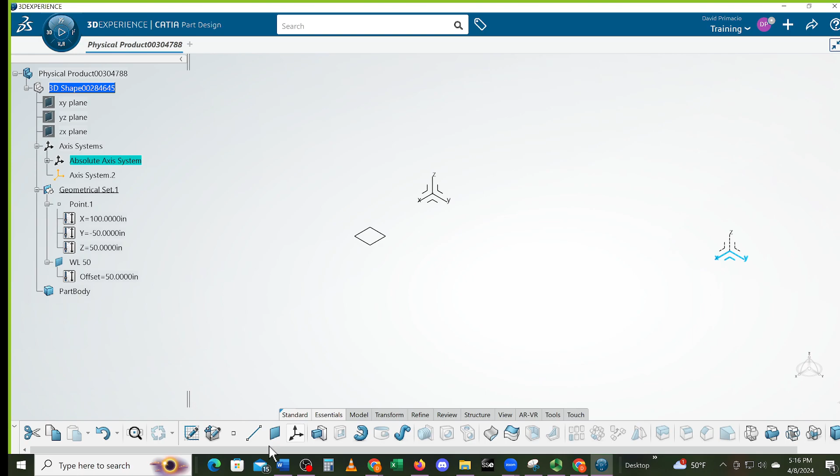So I'm going to create another plane. And the top was 50 plus 5/8. So even though they are on the same plane, they're on a different part of the world.

Everything is referenced eventually off the absolute axis. So no matter where you create your local axis, that's all fine and dandy, but it all has to relate to the absolute axis. That's why he's pulling the planes off the absolute axis rather than the local axis, so that when it goes to the next person looking at it, they already know everything comes off the absolute axis.

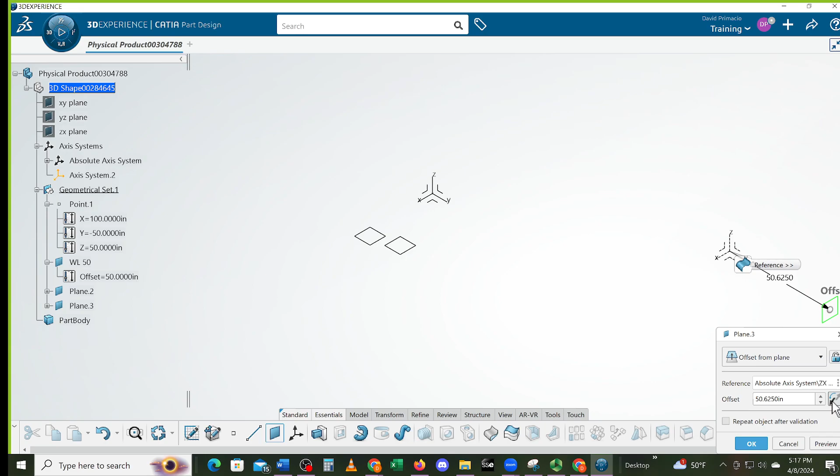Makes sense. I'll reverse it. No, you know what, I don't reverse it. Let's see if I can remember this. I type in -50, was that the furthest one out? Yes. Now again, it looks weird because for me personally, mentally I just gotta move it over here to where in my mind it's kind of close to where I want it to be. But again, I did the -50 because I like it to match up with my y vector.

You're going to see why I do this too, because we're going to create a dimension drawing that doesn't have dimensions on it. It has station line, buttock line, water lines.

And then what's the shortest one? -39.

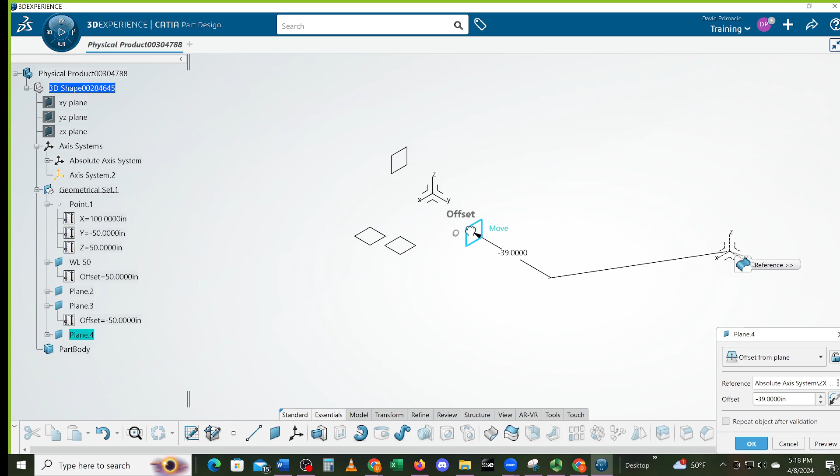See, when I start zooming up, all of a sudden it looks weird. So sometimes I'll move my planes around after I build my part just to kind of get a feel for what's going on.

Now, if I remember right, if I have that axis there, what did I put that on? That was 50, right, in the X direction? Was that 100? 100, thank you, that's 100. And that represented the front of it, right, of the steps, correct? Yes.

Oh, and I didn't create the station the part was built off of. So I'm going to go plane.

I'm getting myself confused. That was, this face is 100, right? The other one is 50. And this is what, 95? Yes, okay, thanks.

All right, so now really you should rename them, because it gets confusing when you don't rename these things, especially if you start getting a whole bunch on here. But for the sake of time, I'm going to just try and rip through this.

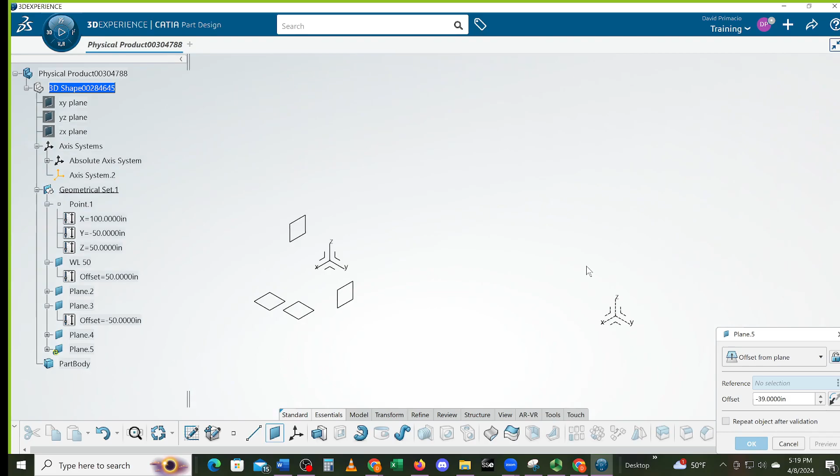So from this plane, we want to go 100 inches, right? Yep. And I'm just going to move it over this way. Now, you don't have to. You could have left them all exactly where they were, create all the line intersections. Once you see your line intersections, then start dealing with it, right?

So, did I show you how to intersect these planes? What did I use? Yeah, another plane, 95. You're missing one. Okay, we'll put that on, 95 in X. Just slide it over there for now.

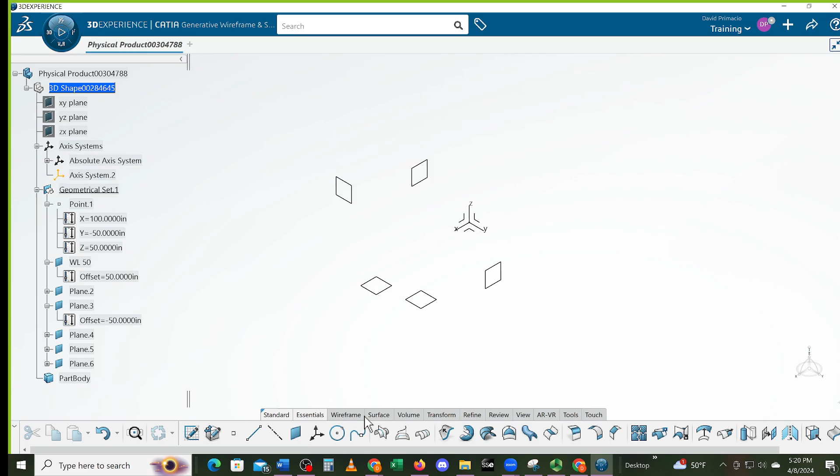Okay, now how did I create those lines that were intersecting? In a wireframe, so I have to switch workbenches, right? Was how we did it. Yes. I just used generative wireframe. Yes, and which tab did we find that under? Wireframe tab, I believe. Thank you.

And then which one was it? Intersect, you guys remember where that was? Which feature that was, at the bottom right? Do you see how that looks like two surfaces are intersecting each other, a flat intersection intersecting like a curved surface? Does that look at all like that to you guys? No, they should have chosen a better picture. Yeah, sometimes the hieroglyphics on this isn't the best.

Did I show you how to create multiple intersection lines all at once? Yes, and you gotta grab all the planes before you hit it.

Okay, so I want to create all the lines on station 100. So what 4 planes would I want to have active? Primacio, where's your Z planes, your Z axis planes? Aren't they there at the bottom? That's this one, and this, well, one. I'm seeing 5, and we should have 6. Oh, not yet, not yet. I'm just getting the 4 basic ones, the outer part of it. So if I want, this is station 100 right here, right?

Yes, and I want to intersect the buttock lines and the water lines to that. Does anybody know how I would do that in one step? Grab the 2 station lines and... No, I'm just going to do it on station 100. Oh, okay. So what would you guys do?

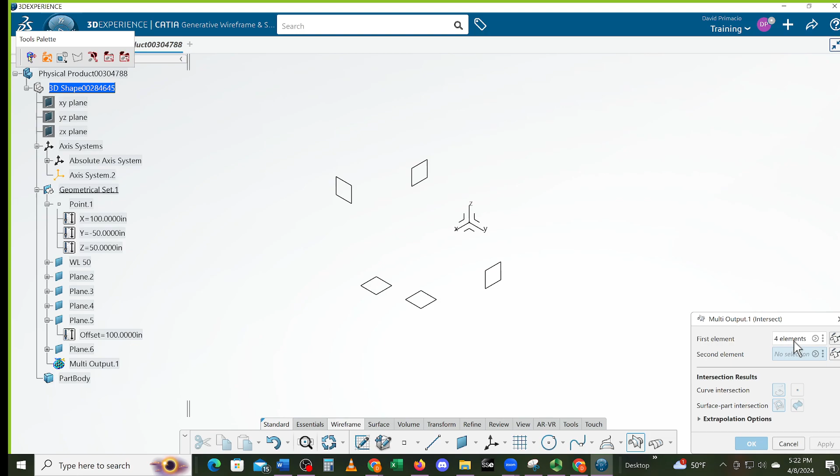We'll do that later on. But I grabbed all 4. Is that what I did in the demo? Grabbed a bunch and then selected a plane? Yeah, okay. So I select that plane and select OK. Yep, and look how far away I am from this. So a lot of times I'll just, after I get something here, I'll move those planes.

All right, now did I show you how to trim those? Yes. What did I use? Trim. There's... You go to, I think it was under Transform? Surface tab, right. I think there's a transform. Right there, yeah, that's what it was.

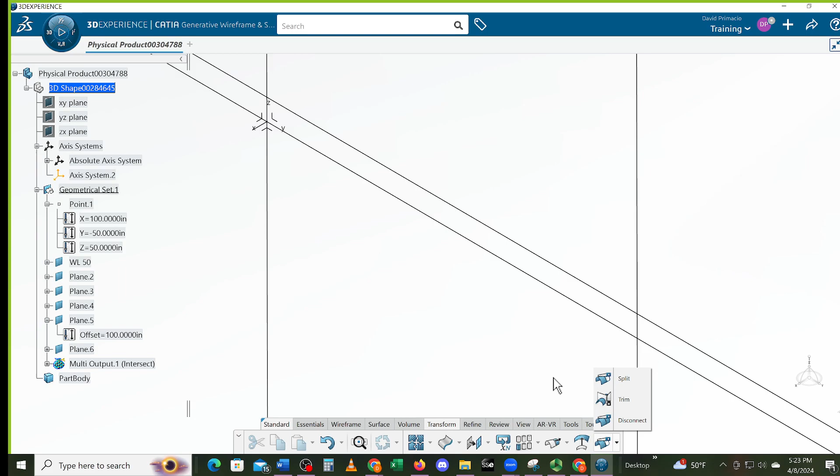Down arrow. So I have trim and split options. Did I do both? Yes, did both. Okay, what would you guys, based on what you learned, how would you trim this up? I'd use trim.

And then we click select on all 4 lines, keeping all the lines we want to keep. Yes, is that what I did? That's what I did, and it worked. Yeah. And then say OK? Yeah.

Yep. Oh, sweet, you went through, did 2 lines at a time, and that's more expressive. But I don't know whether you showed us how to do them all at one time later, but that's kind of intuitive. Actually, you did show us how to do that in the split, and if you reverse engineer that, it was select all 4 and it'll happen. Okay, so basically, if I can't get one to work, I try a different one.

Okay, all right, so now I want to put the steps in. What was the run? 2 inches, 2 inches, I remember right. And it started from the front or back? From here? From here, right? And from here, I said 2-inch run, right? Is what I said? Yep.

Okay, yeah. So what I would do is I would label the one that's here so I know what the hell I'm clicking on, right? That's this plane here. Because I don't think I went in to show you this. I just kind of showed you a general gist to see what you would do for the rest of it, giving you the concept of what to do.

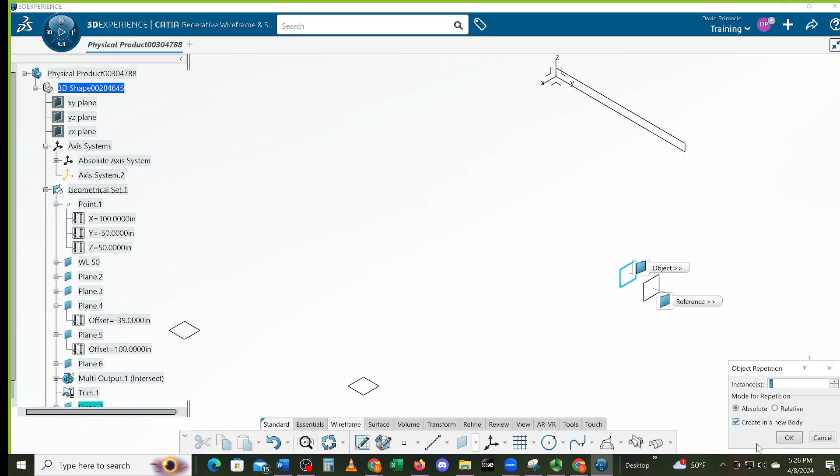And this is where I always get confused because Dassault is always changing this crap. I probably should say another word, but you know what I'm saying. Sometimes I say 2 and it adds 2 more. Sometimes I say 2 and it adds 2 total, this one being 1 and another one being that. And there's no preview, so I'm going to try 2 and hit OK and see what it does. So this would be from here to here is 2 inches, here to here is 2 inches, and then here to here is 2 inches. That would be my first 3 steps, right?

Yes. And then I got this top plane. Nope, that's the wrong one, isn't it? See, a lower... I got the plane, because this one looks lower to me because of where I set that. So I'm just going to double click it and move it up higher, so in my mind it's higher. And it's the one at 50.625, right?

Yes. Anybody have any idea what I'm thinking right now? What I'm about to demo? Kind of, intersect them. What am I going to type?

Why did I do 1/8? Oh my God, what happened? Oh David, what are you doing? I got ahead of myself here. Forgot to say okay.

Does anybody know where I'm going now? You're going to build the steps, the tops of the steps, the 1/8 inch step. Thank you. On the 2 from this plane, and oh God, where is it in the tree?

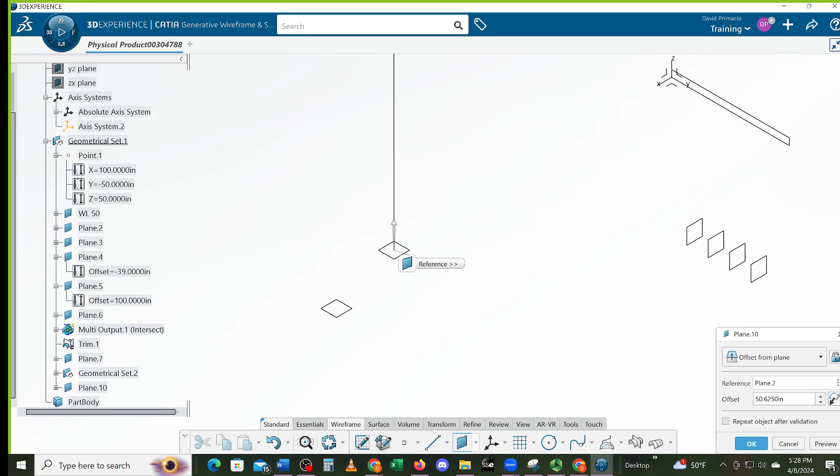I don't know, I see it highlighting in the tree. You don't have it highlighted. See why I need to label this stuff? That's the top one, right? So if I highlight this and then go to plane, then I know what the hell which one I'm working from. We're gonna reverse the direction.

See, now I'm not really worried about station line, buttock line anymore. I'm just creating planes that are relevant to building my part. Just depends on what you're working on. Sometimes every single cut you do, you have to establish your planes, where they're coming from: station, buttock line, or water line. All right, we're gonna change this to what?

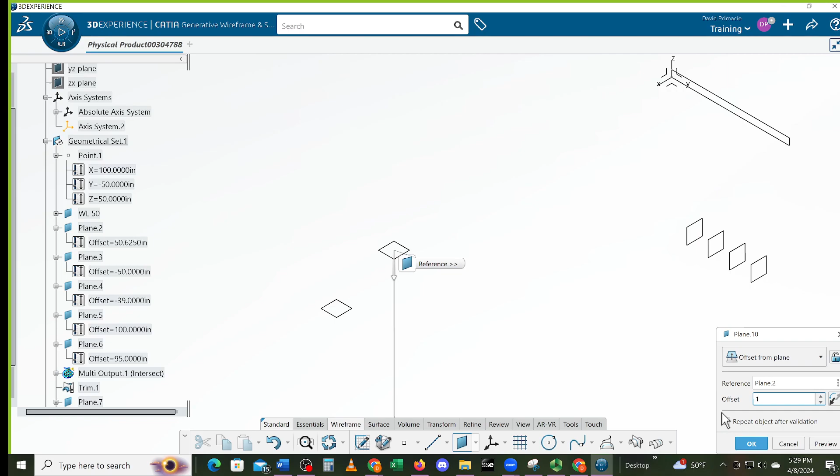Y 1/8? 1/8, yes. And why did I do 1/8? Because that's how tall the step is, and that according to the drawing, they gave it from the top, right? Yes. So 1/8. And then what else do I want to click on?

Repeat. Thank you, Lilia. Say okay. And then we're going to type in 2 more. Yes, okay. Now what we're going to do, anybody want to guess what I'm looking for? Intersect. Now when I intersect...

If I didn't grab all 3 first, if I grab this one, can I grab the other 2? No, it won't let you. Even if you reselect that? If I pick this, then it should let me grab more planes. Yeah, okay? So this is a different way, I don't know if I showed this or not. There's just so many damn ways to do it, I just try to incorporate different things here. And then I just close it off because it tells me it has 3 elements.

Do you know what I'm going to use here? Probably the other planes? Yes, the other planes. This one, this one, this one, and this one? The first 3, I think. These three, yes, because the first one is the first step here. I already have that. Now I was able to just trap that and it grabbed all 3 planes.

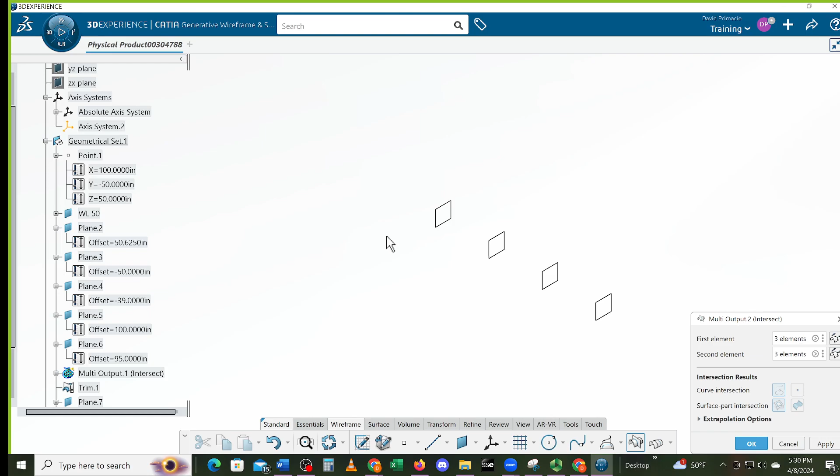I'm going to zoom out so you can see what a freaking mess this is going to make. I'll select OK. What? Did I do that right? I think I'm supposed to do the station plane. What am I thinking?

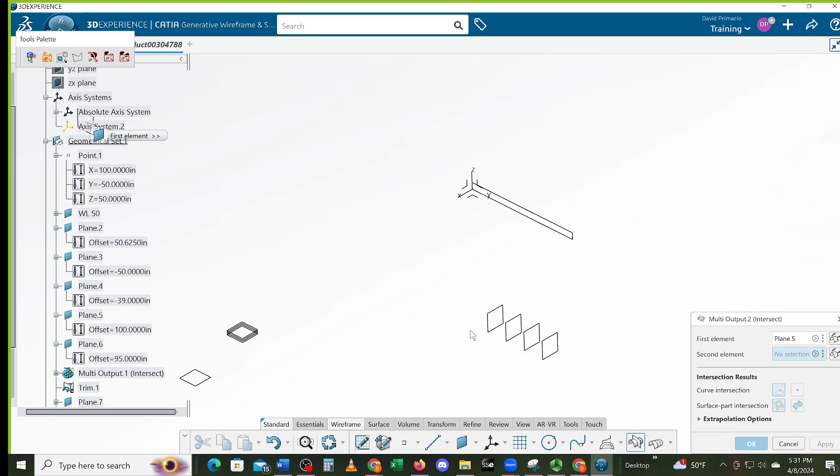You guys, just watching me screw this up. I'm going to grab this plane, which is station 100. Totally screwed that up. And then intersect these 3 planes. So I got 3 planes there.

But I might as well do these 3 planes while I'm at it. So again, if I want to, I could click this on and just pick a particular plane if I wanted to. Oh God, I guess I just closed that off. So it tells me it has 6 elements, right? Yes. We'll select OK, and then see what kind of crazy mess this is making.

All right. So where was that trim command again? Transform. From here to here? Now select the command. So I'm going to select trim. That one to the top. Does that make sense why I'm doing that one?

Yes. Although I'm getting this problem. So sometimes when I'm having this problem, I'm just going to resort to split. You're doing trim again, you gotta select split. Oh, that's it, element to cut.

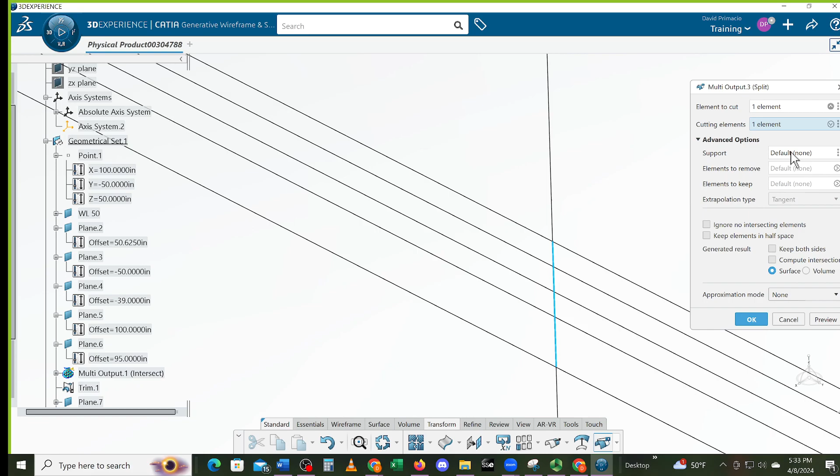Cutting element. What if I click this and hit this button? Oh God, no, can I not do that? I thought I could add another. You can do multi-selections on that, and there's like a little flip direction button on each of the lines that you select, so you can choose which one you want to keep.

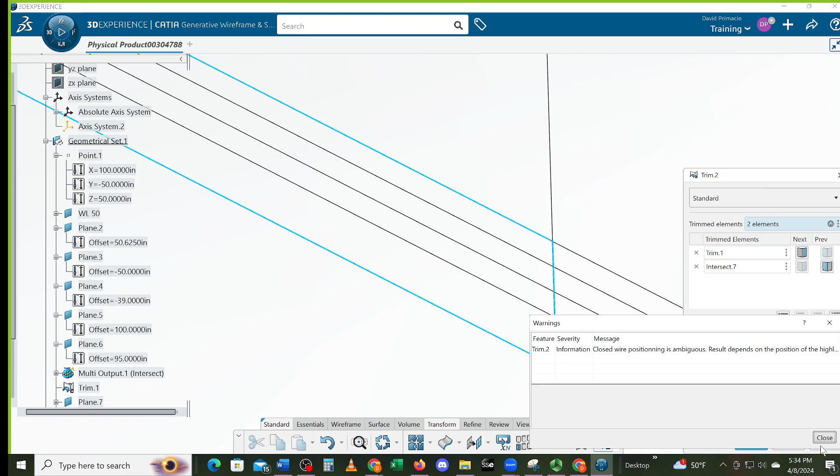I really want to trim though. Trim. This element and this element, it does not like that. It would be nice just to have an eraser and erase the lines you don't want. I know, like in SolidWorks? Yeah, SolidWorks, exactly, that's Sketcher.

Yeah, like in Sketcher, you can grab an eraser and just erase the line you don't want. Yeah, power trim. Wait, why didn't that work? What did I screw up? Zoom out for a minute, Formaggio, please.

Okay, trim, am I in trim? I want to do split. Split, element to cut: this element. This element's what I want to split, and this element here's what I want to split. So I got that line.

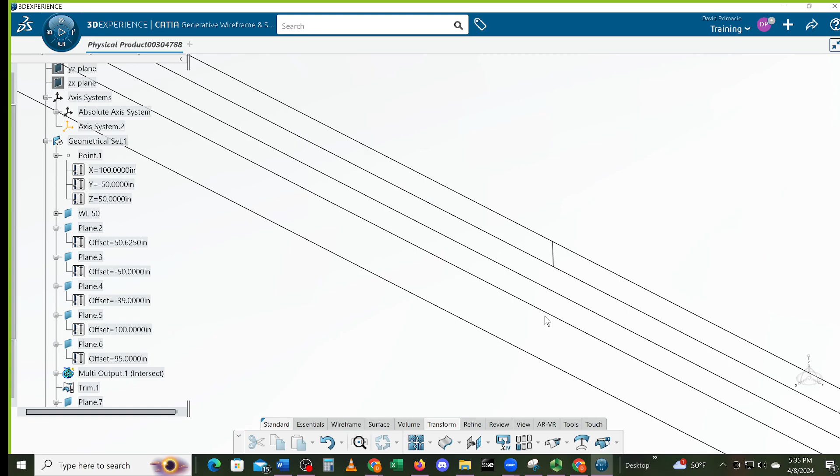And then I'd want to do the same thing here, right? Trim. No, split. Did I hit the wrong button? No, you got the right button. And I gotta go down to this one. And see how that blue line split? And then I want to trim this element to here, and to here.

Split this element to here. That's where I'm having a problem.

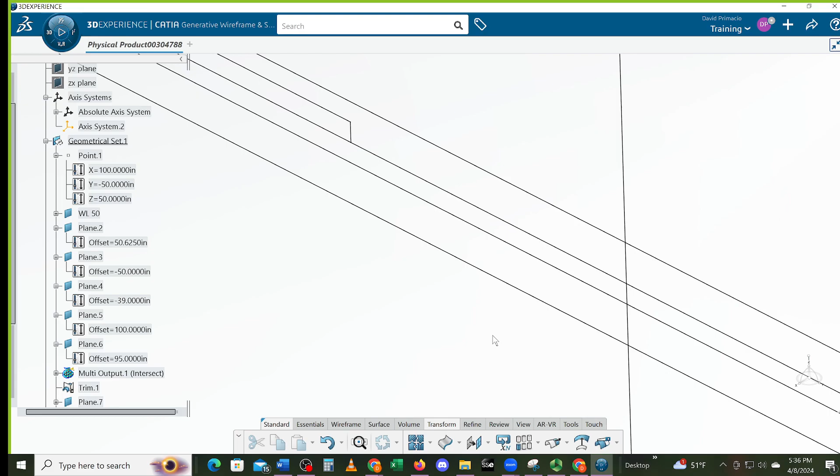I think it's because it's an original line. The way I would have done it, I would have worked from the very end of it instead of the top of it. I would have started opposite of where you started. I think I'm gonna get the same problem. Yeah, because it's the outer line.

It's already part of a trim, this square, because when you originally created the four lines, it went into a trim that you did. Right, that's why I don't like this. What are you trying to do?

Trying to create the steps.

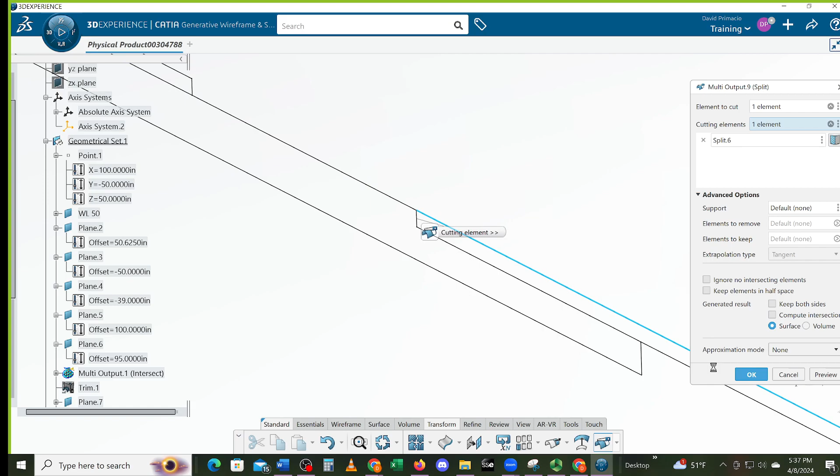So what would be an application of this method that would be better than using, say, point direction? I never said anything other than that. The idea is to learn how to do line intersects. I'm not saying one's better than the other. I'm just showing you the multiple techniques you might need to know. Got it.

I'm going to trim this one to this. Trim, or split this one to this. Split this one to here.

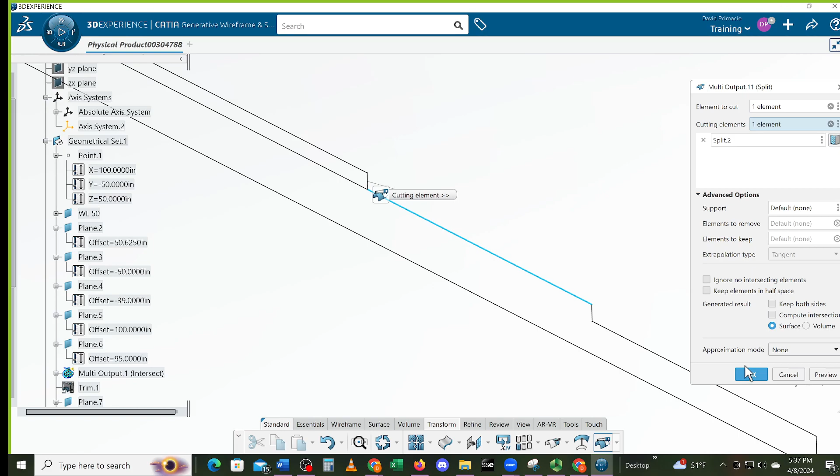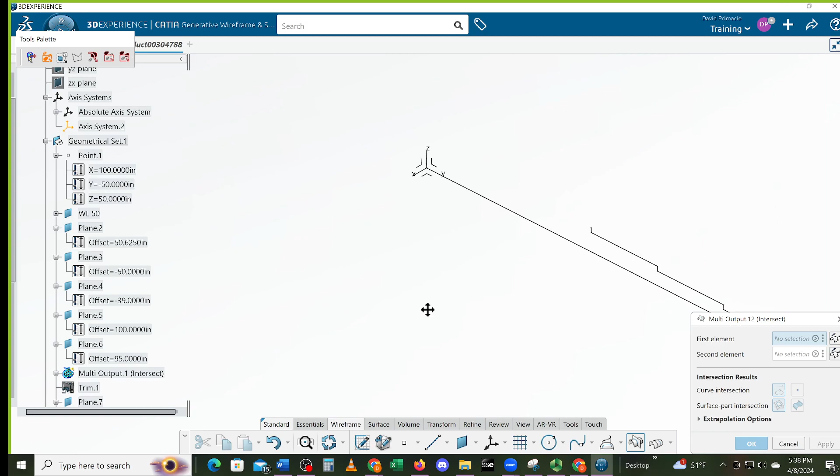Somehow I wound up erasing my last lines. So I'll just go back to intersect, and intersect this top plane.

Sorry. I'm intersecting the top plane to this buttock line, which is left buttock line 50.

This one here, right? That's a waterline. Oh, that's waterline, I actually named that one. It's negative 50, yeah, for the negative offset. 50, that's right. Thank you. Thanks for your help. Select OK.

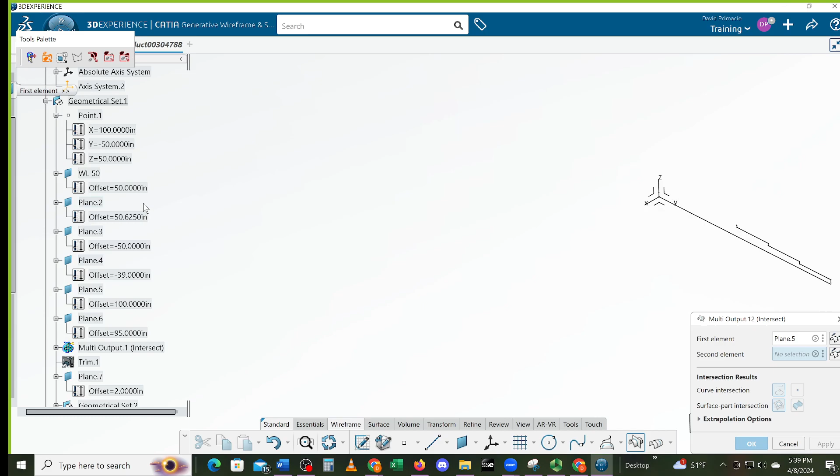Oh, wait a minute, sorry. I want to do... needed to put the station. Intersection to the station 100, and intersect to waterline plane 2, plane 2, and left buttock line 50. So I just do them all at once.

You didn't select the buttock line. Oh, I guess you're right. Well, let's just do another one. Intersect the buttock line here, right? To, yeah, yes, station 100. This one. Yes.

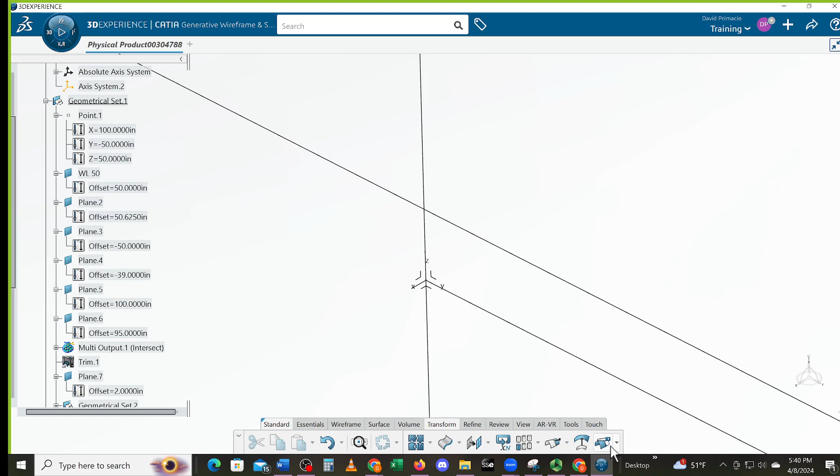And we'll split this item to this item and to this item. Oh, you've got to be kidding me.

Split, you gotta go grab the planes, dude. The plane itself, you have to. Oh no, you got it. Never mind, sorry. Split this one here to this plane here, right?

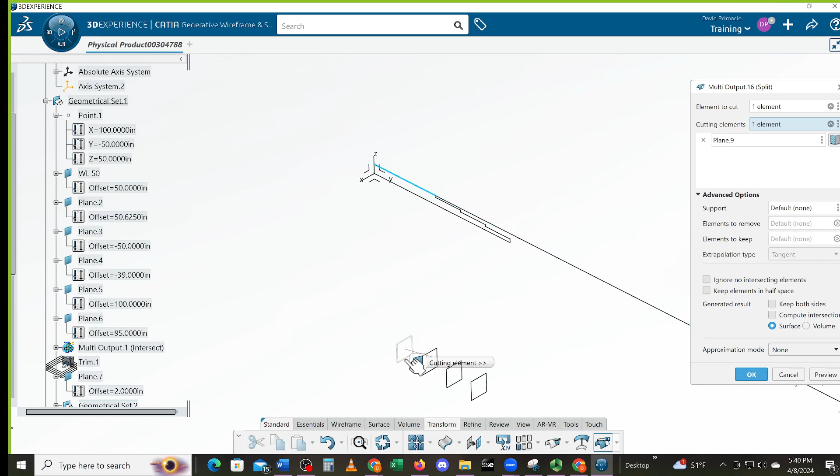Yes. Did I do that in the demo, splitting to the planes? I don't think so. Okay. Well, there are multiple ways we can do this. I learned a lot about planes trying to do this.

Excellent, all right, so I built that profile, and I'm going to create a face that represents this entire profile. Does anybody know where to find that face feature? Surface? Okay, so points, lines, curves, and planes are under wireframe.

A surface represents a skin, so like something you would actually touch a surface of, like the hood of a car would be a surface. So this face would be a surface called a face or a fill, right? So anytime you want to get a surface, you use the surface tab and some type of surface here, right?

Yeah. So this one here is the fill command, correct? Yes, and then I just have you pick an edge.

Was there an easy way to grab all the edges? Right click, auto detect. Another thing that works in the sketcher workbench.

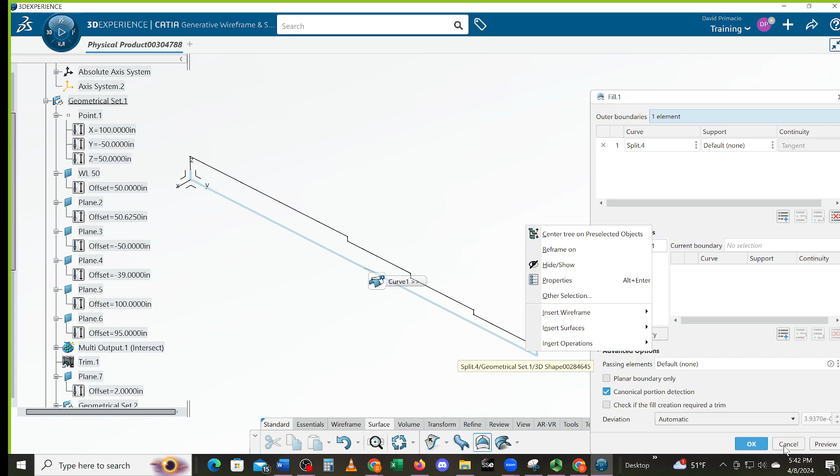I bet you if you did it before you hit the button, it would work. Well, maybe not. Sure seems like it would be handy, right?

And when I go to fill, drag and do the trap thing, when I go to fill, it seems like it should just know where all my adjacent elements are, without me having to do that. And I think it grabbed the axis of where the error was.

Oh God. Just go down the line of the listed elements and delete the axis. Is the axis even selected though? It's not highlighted. It's not. It will show, it will say support or something like that for the axis, his specification or...

If you look at your local axis, it's not blue, right, it's not active. It grabbed that Z line though. Wait a minute, what the hell? I think it's an overlap there, from when you were doing the trimming.

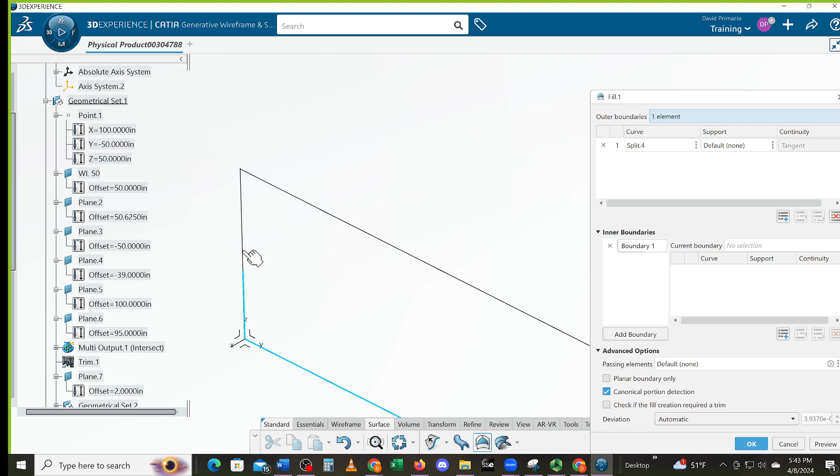I got a bonus line there I'm going to delete out.

Oh, what? Didn't like that, did it? How come?

Why are you doing that? So what I don't like about these trim commands is it doesn't just trim lines.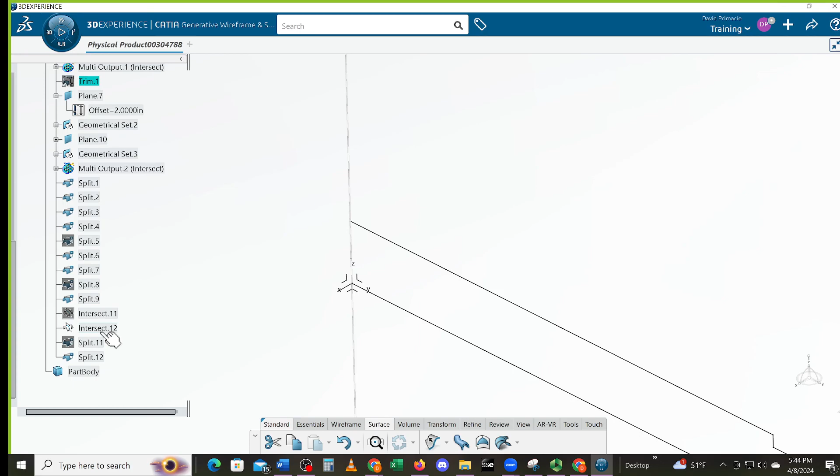When you do a trim, it just keeps adding more stuff to it and hides the last trim. So all these splits and trims and all that, there's all those other ones still exist as whole lines.

Yeah, that got really annoying for me. It's very freaking annoying why they changed this to do that.

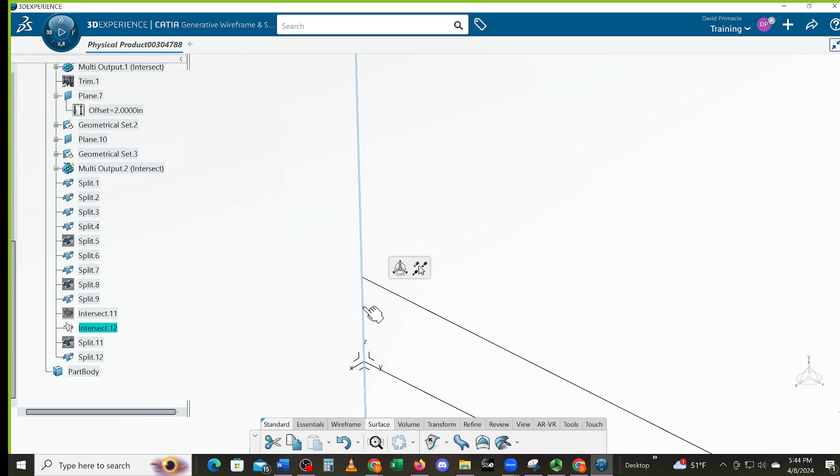Can't we just create lines from plane to plane? I did point direction, I think. Yeah, but the point of the exercise was because we're going to do a lot of line intersections, and I wanted you to start getting comfortable with this. I'm going to start moving on to the next thing is all.

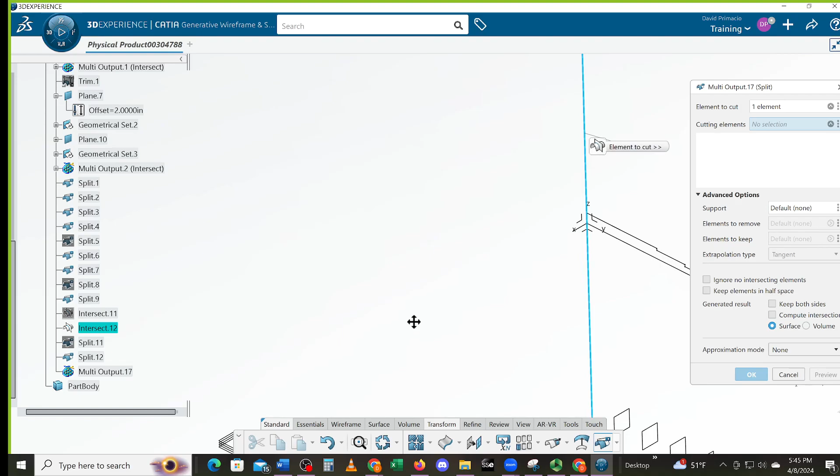So when I go back to transform and trim, can I just, oh no, I can't. I'm going to pick this water line here. And where's my other water line?

Oh my God. That's it right there. 50 point. This one, plane 2. Plane 2.

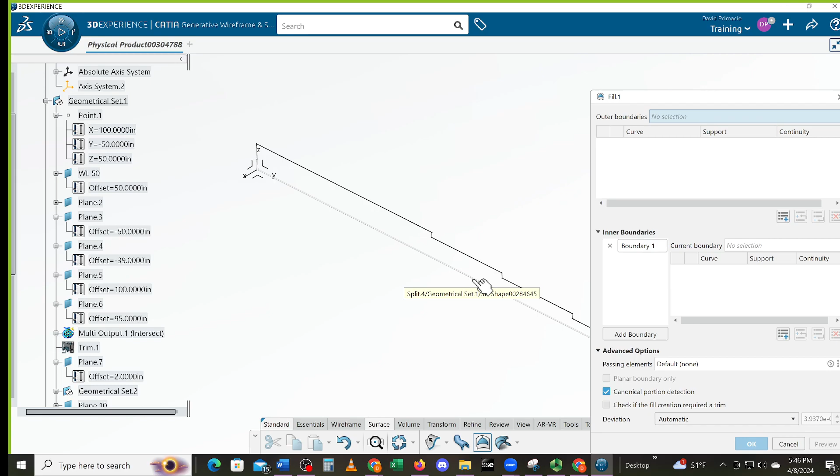Because when you try to delete that line, you click delete once, and then the second time, you should have deleted the line that you created from.

So the first time, you're deleting it, the trim, and the second one should have deleted the line. So you have a double line on that.

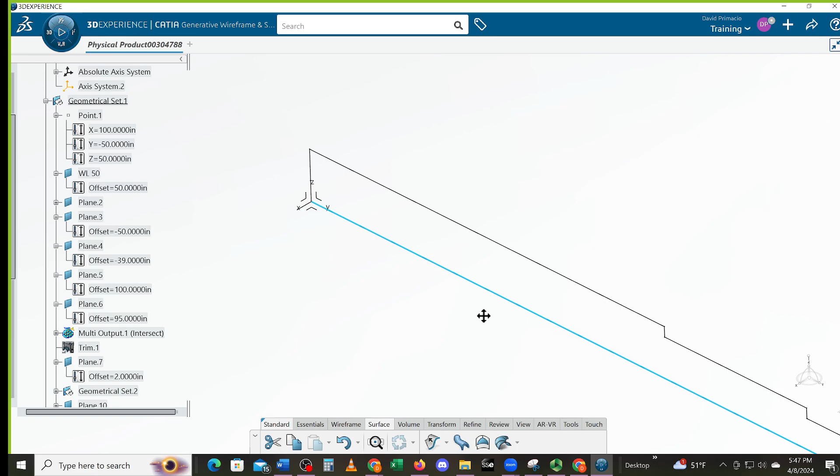I don't know that he's got a double line. I think that's just the Z-axis line coming out like the Y and the X does. No, yeah, I don't think it is, because it's got a point at the end. If he zooms in, you can see the ball. You see it?

Where'd you put that point, Kamasha? Ooh.

It's because of the very first way I did that little trick. But the problem with the way I did that trick, it made this all one entity, this whole thing here, when I was doing that. So now I think I got duplicate lines here.

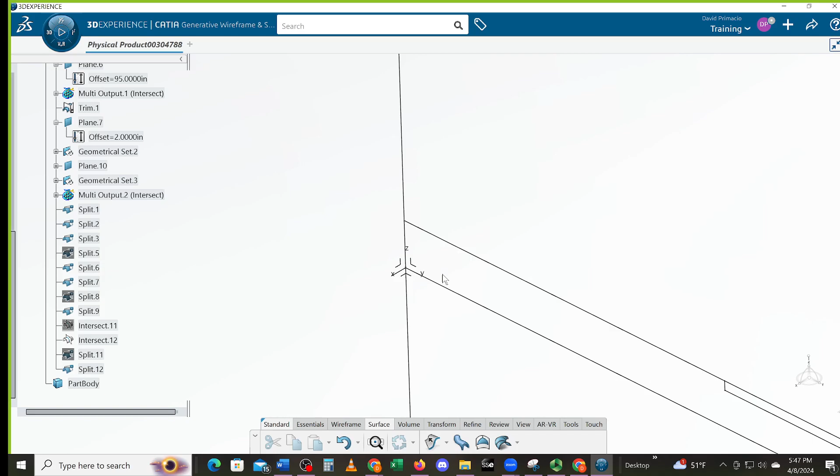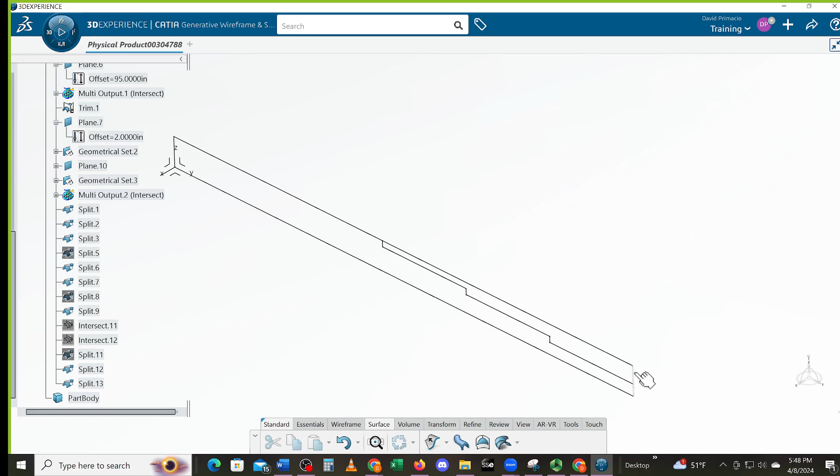It doesn't like how I did that first part of this. And if I try and delete this, oh, that's really annoying.

Split. Oh, I got too tricky in the beginning.

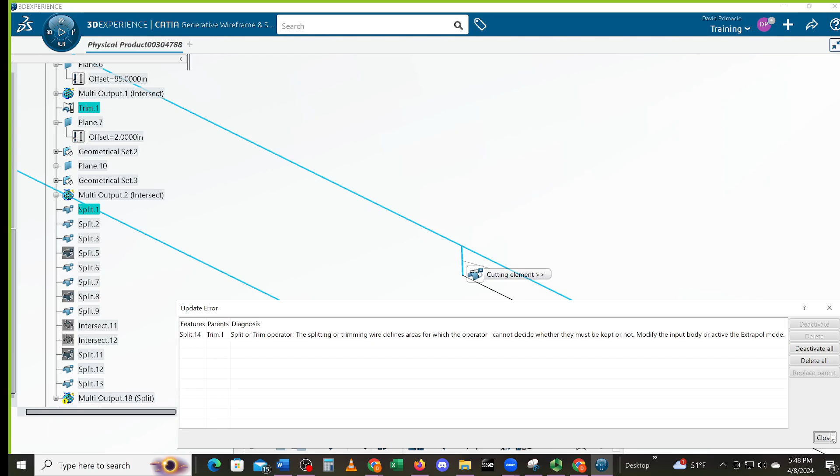I think you're gonna still have duplicate lines. Ooh, it doesn't like it now. I was hoping to delete the trim and just get my original intersections back.

But can it delete that? Did you take away the first trim that you did? That's this one here, right? Yes. The problem is when I delete that, I had all this other stuff I did after that.

Was my issue. So it's not gonna let you. It does not like it. I was trying to see if I can't work around it some other way. But...

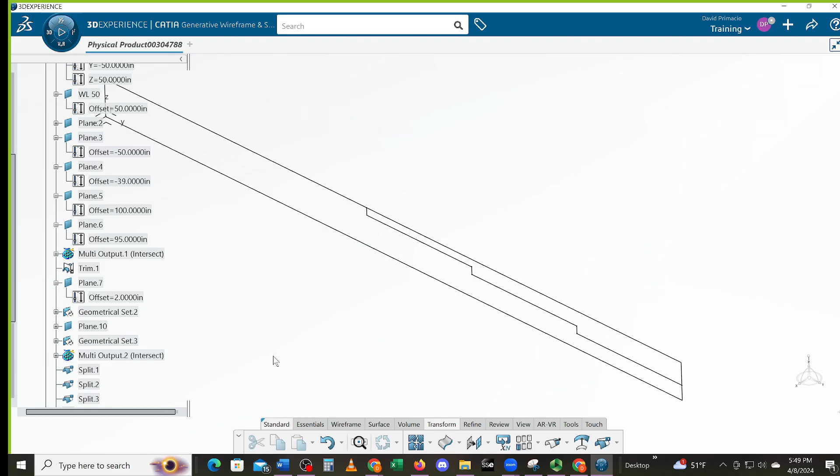That's what the error was when you were trying to split it. That's what the error was, because it was saying that you tried to delete an already trimmed line that was already trimmed.

Oh, that really sucks. Well, I guess my first technique, the very first thing I did when I started this off and did this trim...

Was not something that was going to let me do it. And unfortunately, once I continued on, all these are based on what's going on with this trim.

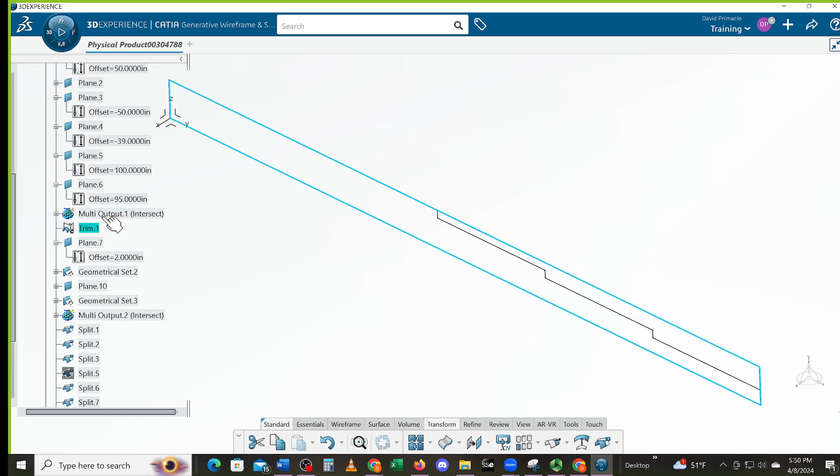So can you try deleting the first intersect and see if it will keep the rest of it? The multi-output intersect that you did, right above the trim, the first trim that you did. This one.

On the tree, it looks like it's showing me it's linked to all those things. I see, all those got to go with it because I went ahead and worked off of this trim.

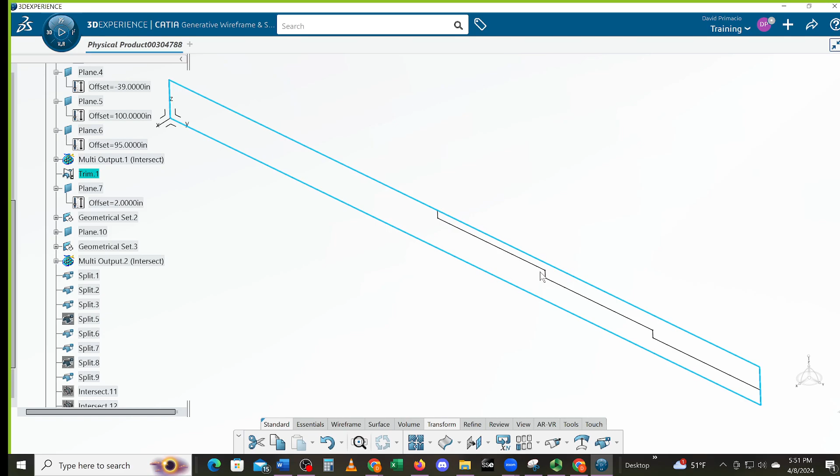And once I started doing all this other stuff to those trims, it screwed that up. Yeah, so now you just can't do the fill because you have duplicate lines that are linked.

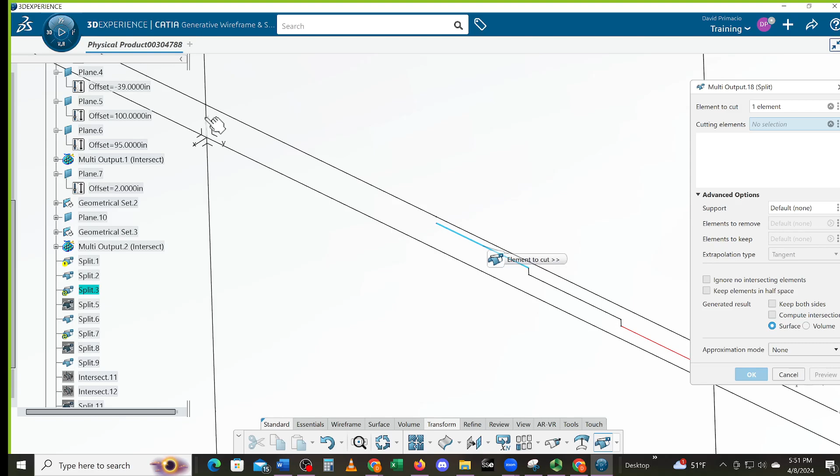But if you would have started at the lower end and worked your way up to the taller end, I think that would have been avoided. I'm not sure, but I don't know why this is red now. And can it extend?

Oh. If I had this line. Oh, you gotta be kidding me.

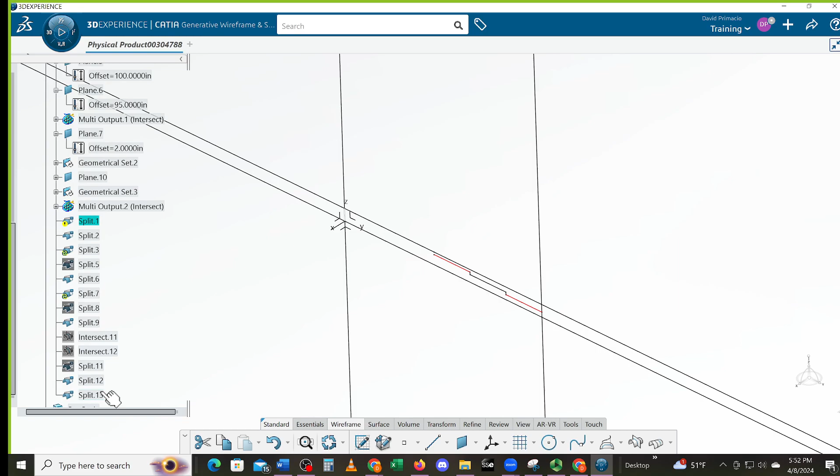I don't have a good solution for that. Delete it all and start over. Yeah, it's free, so it's good practice. Sometimes it's a little bit beyond salvation.

So there's all my lines. The other day I was looking for that camera or video option where we went back to the beginning of the product, paused at a point, and made adjustments that would affect it, but I couldn't find that tab. That only works on the part body.

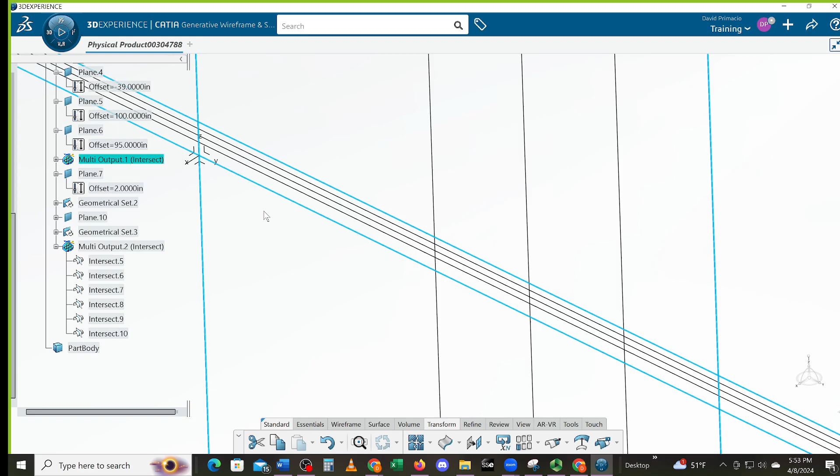Before you start trimming, delete the first intersects, because that's what's creating the duplicate lines, I think. Well, I think what screwed it up is that these are all individual lines. When I trimmed it, it made them all one. When I do a trim, it doesn't just trim lines like you'd think—it makes that square one entity.

So if you click on Output.2 Intersect, is there any lines that are overlapping? Okay, so I did all those for my steps.

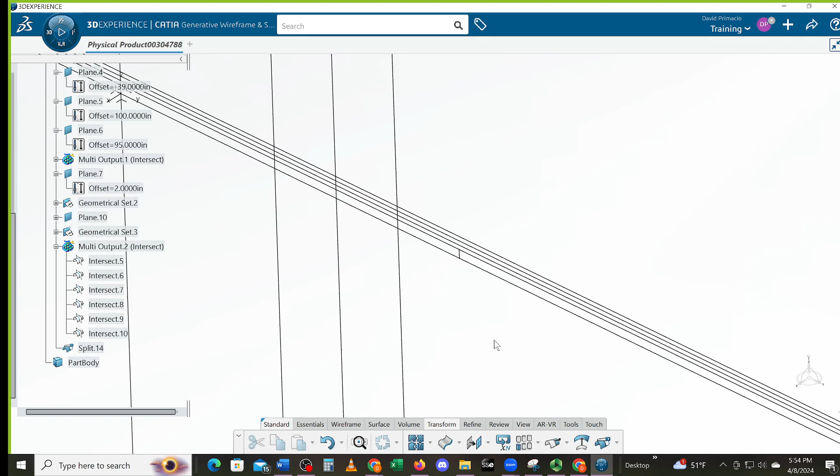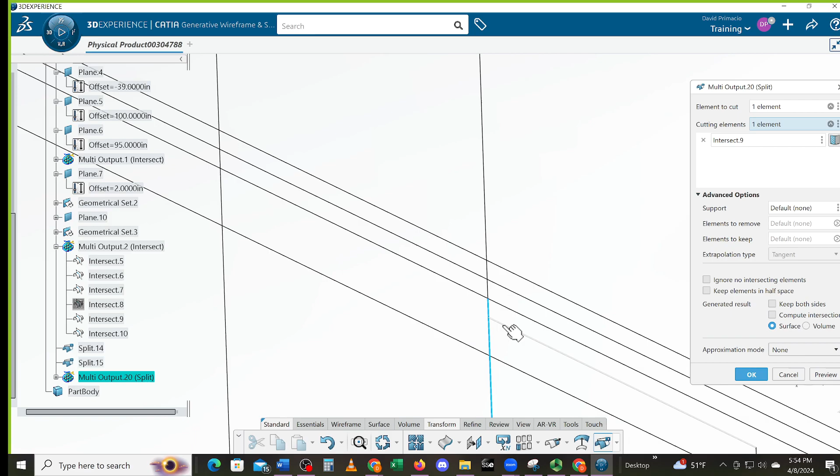And then if I split—this one to this one and this one. Split this one to this one. I'll work my way back around. Split this one to this one and this one. Split this one to this one and this one. This one to this line and this line.

Is that right? Yeah, it seems correct. There's a step going up now. This one to this one and this one. This one to this one and this one.

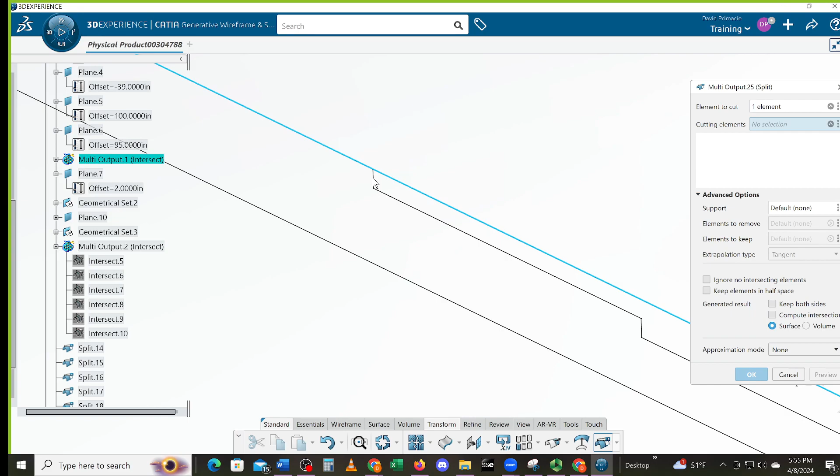This one to the bottom line, this line, and this one to here. Here to here. Here to the top and the bottom. And then this bottom line to here.

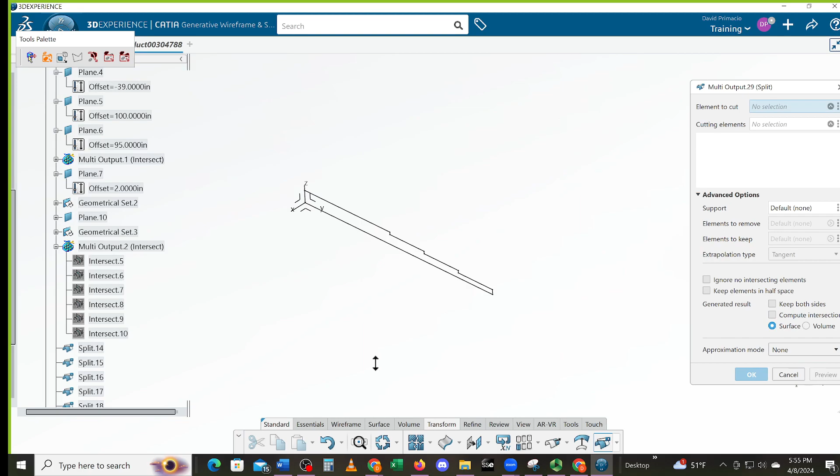Select OK, or cancel—cancel. And then fill it. God, I wish I could auto search that.

This split here—why is that split hidden? What happened there? Interesting. Fill that. Oh, you, of course.

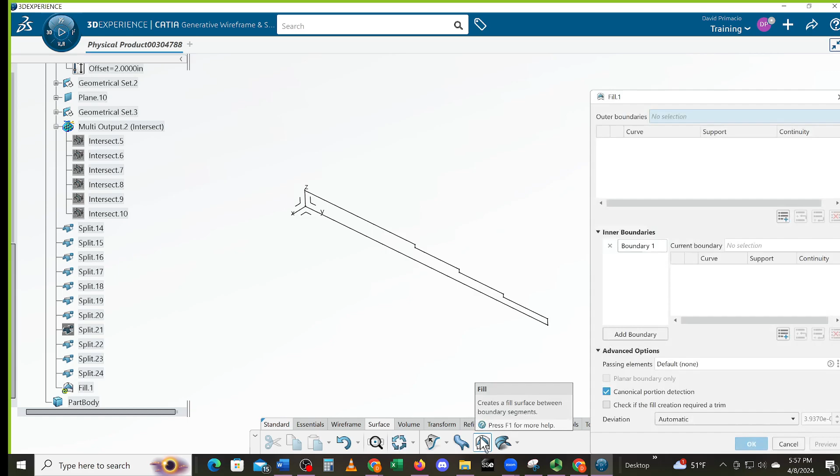Really? Fill this. Making me pick all those one at a time? Select OK—will not work.

So now we got our fill. And then we got to switch workbenches, correct? Yes, because if you want to make a solid, you've got to be in part design. Who was I just talking to about how the fill is not showing up?

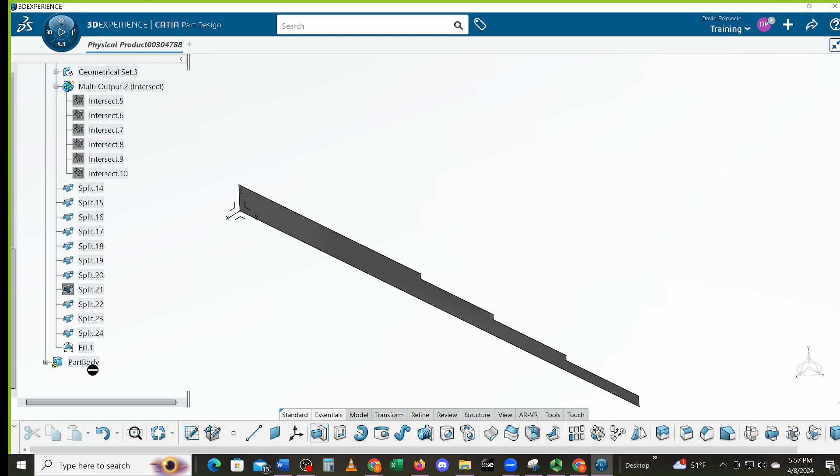I think you're right. When I do the pad, it's gonna warn me, but that's fine. I'm gonna grab that fill. It tells me I gotta specify the direction though, so I'll right click here and pick the X direction—or you could just pick the X right here, either way. And we're gonna reverse the direction.

What I like to do is set the first limit as where it's gonna end, and I want it to end at the plane. Do you know what plane I'm gonna pick? Station 95. Yes. Which seems weird, because it seems like first should be where it starts, but first is actually where it ends. So I've got to find station 95. That's this one, right? Yes.

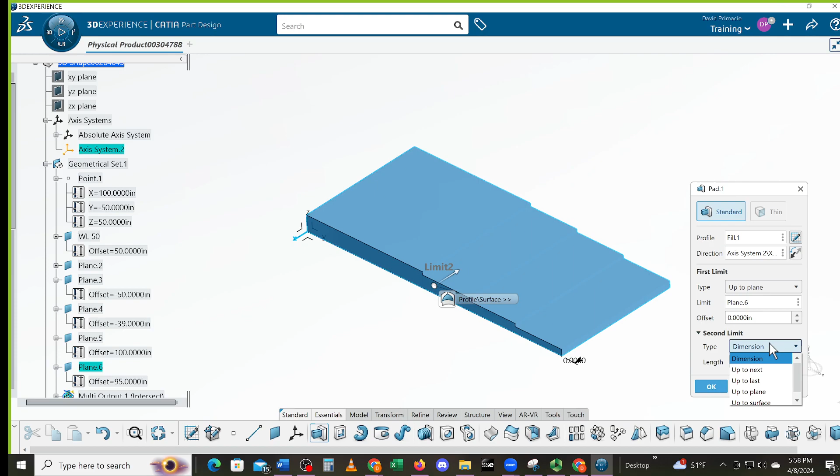And you should always control your second limit as well, which would be up to a plane. What plane would I link that to? Station 100. What in the hell is it doing?

I don't know why I did that. I just hit preview to bring it back. So what I'm saying here is I'm using the fill profile to link it to plane 6, which I should have renamed to station line 95, right? And I should have renamed plane 5 to station 100.

So when I select OK, I've created this part using all these planes. I use planes a lot in production, so you should get comfortable with it. We're going to do some stuff where I create a bunch of buttock lines, and you're going to need to know how to do all these line and plane operations. We're going to do a lot of line intersections—it's going to be way faster when I do that. You'll see when we get to that demo, okay?

Now, what's supposed to happen is if I change this plane to 90, it should automatically move that. And if I change this plane to 110, it should automatically move that part, okay?

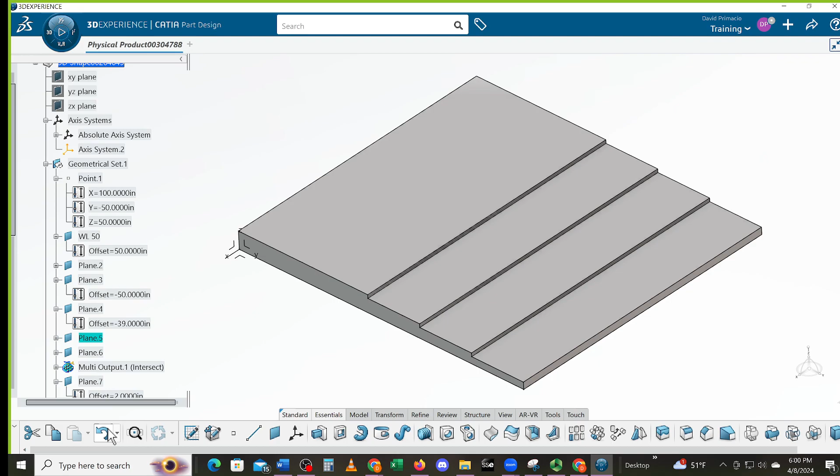Wait a minute, this looks too big. Oh, I gotta do one more undo. So Primacio, if you were to change the left buttock line 39 to left buttock line 35, would it continue that 2-inch offset? No, it's just linked to where the plane is. So if I change this to minus 40.

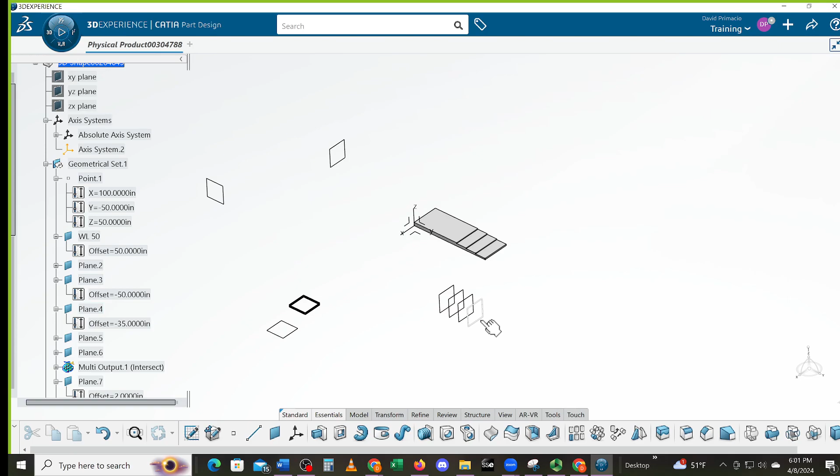Oh yes, because of the way I link the reference plane, it's offset off of that plane. So if I do this minus 35, the flat is going to be a lot shorter. Right, or I went the wrong way. I went minus 35. I was just wondering about that. Because I made all these 2 inches apart, so if I'm moving this plane, these are always going to maintain 2 inches apart.

I think the issue with mine is that I built it all in wireframe, because you just have that single surface for your fill. If you can give me a picture like mine, that's what I was aiming for. If you can use line intersection to create the whole thing, just for practice of being able to create everything, all lines, and then putting in the fill command, that's bonus points, okay? I did do that and it's graded, but I don't think I got both. I forgot all about that, but did anybody else build this all faces and no solid?

I did it in part design. It was so much easier. Yeah, I did it, part design, but that's not the... No, I did the faces and the... I was saying it was me that you were talking to earlier about that one part.

I actually think now I did all that incorrectly, because I just did a sketch based off the questions and then I filled that face and then just did a pad on that. After I answered all the questions, I just made a sketch. You were right, and then I wanted it done this way, but anybody that did extra practice of building all the planes I would need, and doing all the intersection and all the trimming — I did, Mr. Vermontiel. Okay, you guys got to remind me, if you did it, to give you bonus points for doing both ways, okay?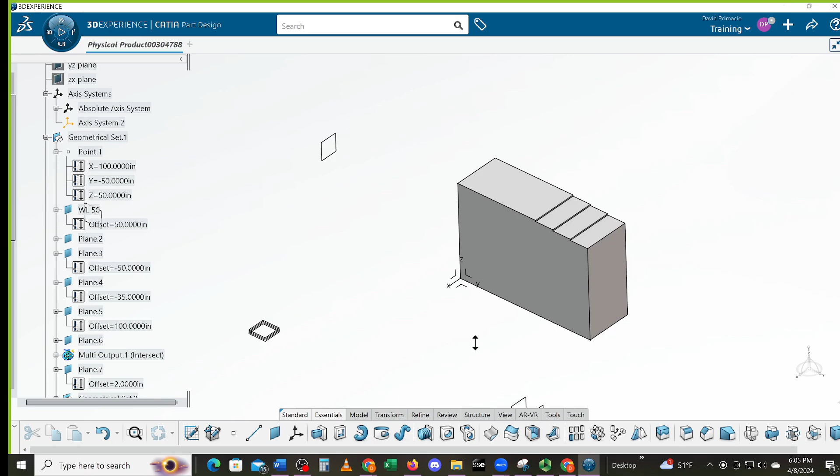Okay, I could change this to 55, right? The only problem is the local axis doesn't know to move, so I got to delete the axis and start over. You guys agree? Delete the axis and start over to get the local axis there? And it will link it somehow? I could have linked it if I would have built it off this local axis, but I went off the absolute coordinates. So I would just change this Z to 55, so now I wouldn't start all over — I just move my local axis there.

When the CNC guys go to machine this part and they need the local axis, it doesn't matter if it's linked to the part or not. Even though I tell you guys to link things to the axis, it doesn't affect the CNC group. It just affects where it's at.

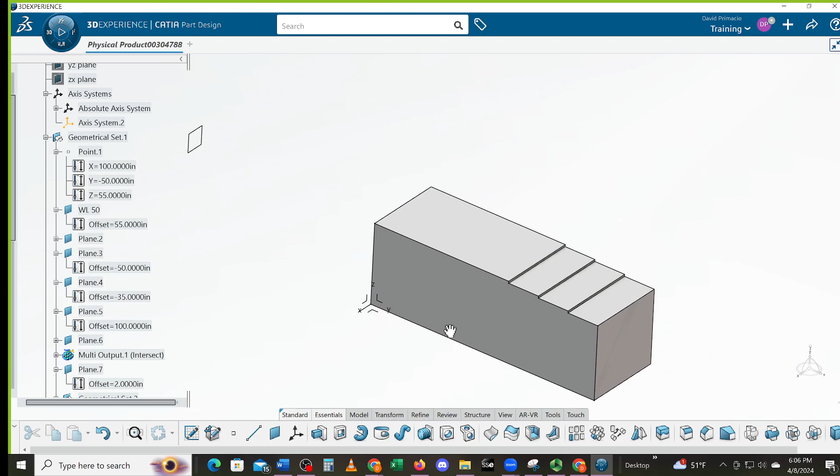This axis is just going to establish where it goes on the tool plate when they build it. The weird thing is, when they build the tool fixture for this, instead of building it on the ground where it would be and building the part on the ground, we were building tool fixtures in airplane coordinates, all funky looking. But that's how we had to do it because they didn't want the engineering part to move. They wanted everything to evolve around the engineering part. I had to do that for Airbus, Freightliner, and Boeing.

The bigger companies typically do that. You guys see how it's rotating really weird like this? Y'all know how to get around that, right? Yeah, middle click your center of rotation you want. So if I middle click right on the part, make sure you middle click, then when I rotate, it won't fly around so much. Okay, so that was my demo.

Lesson learned: that's why you don't use the trim command for this particular step, use your split command instead. Again, I just created the top, bottom, sides, all the main outside shapes of this, and then did my intersects. From there, I started working off the top plane to go for my rise, and then I worked from this front plane, not the solid, not anything. I didn't create new planes. I worked off existing planes so that if I move this plane or that plane, everything knows to follow through for the steps.

Okay, so if we go back... nope, I'm clicking all the wrong buttons here. If we go back... oh, I had the Word doc up, that's what I had.

The rise, the answer for this would be 1/4 inch. You guys agree with that? Yes. How'd you get 1/4 inch? Because the thickness of the part is 5/8, and then the rise was 1/8, and I had 3 of them, right? So that totals to be what? The rise, if I have one, I have 3 rises. So what's the total of the 3 rises? 3/8, right? So I just subtract the 3/8 from the 5/8, and I get... 2/8. Sorry, 2/8, and that reduces to 1/4. That's how I got a 1/4 inch here.

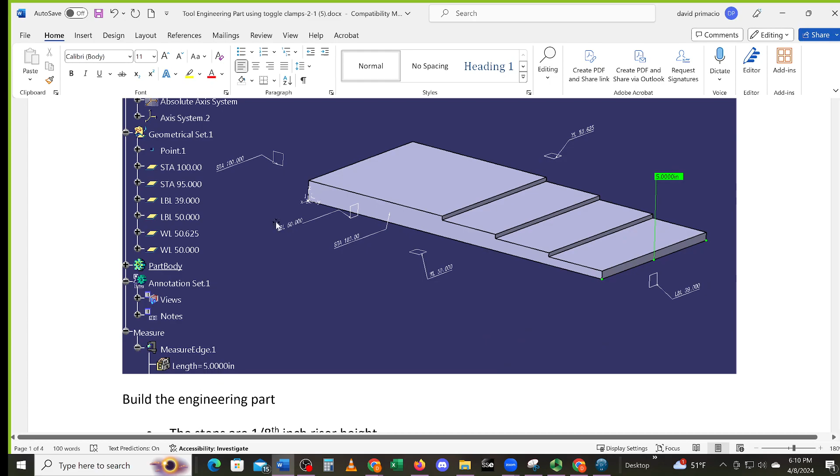What's the length of the platform? 5 inches. How did you get to 5 inches? Because run is 2 inches and there's 3 steps. And the length of the part is 11. So 11 minus 6. How did you get 11? That's negative 50 minus the 39. Left buttock line 50, left buttock line 39. Yes, 50 minus 39. 11. Minus 2. 2 times 3. Yes. Do I need parentheses? No, order of operations. So 2 times 3 is 6. 50 minus 39 is 11. 11 minus 6 equals 5 inches. Everyone agree with how I got that? Yep.

Can anybody tell me what they got for a volume? I got, I don't know if it's correct, but 26.8750. I got 26.8750. Excellent, excellent! Anybody else get 26.8750? Yep, I did, yes. That's a good sign, right? If all of us are getting it, we must have got it right.

And what do we get for a CG? Let's see. X is 97.5000. Y is 436163. Whoops, sorry, Z is... What's a Y again? 43.6163. And then Z is 50.2660. My Y was different, but my X and Z are both the same. I'm sorry, can you give me the Z again? Yeah, Z is 50.2660.

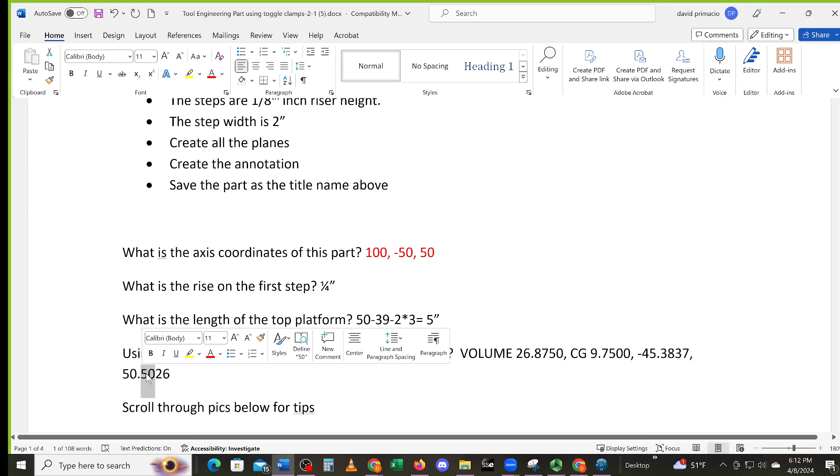Well, yeah, correct on that one, but my CG Y is minus 45.3837. Mine is the same as yours, Saeed. What was it? Minus 45.3837. I think that's what I got. Yeah, yeah, that's yep, same. Do I have this? Do I have Z right? 50.2660. Yikes. It's negative 45. Yeah, negative 45, and your CG, so you have a point in the wrong spot.

It's 2660. Sorry, thank you, no worries. What did I do wrong on X? It should be 97.5. I was gonna say that seems too short. Obviously, right? Because we're at 95 and 100. It has to be the average of that. 97.75, 97.5. Yeah.

Does my volume and CG look right now? Yes, that's correct, sir. And then weight.

2.6215. Yes, sir. Everybody agree that's what we got for pounds? Yep.

7.54. I think I did something wrong though. It's really weird that you would have the same volume. Did you apply 6061? Because I did it all in wireframe, and I put the pad in there as well. It doesn't matter because you make a part for it and the part weighs with the material. So what material did you use? When you did the weight, you picked the part body, then hit inertia, right? Yeah. You applied 6061 T6 aluminum. Yep.

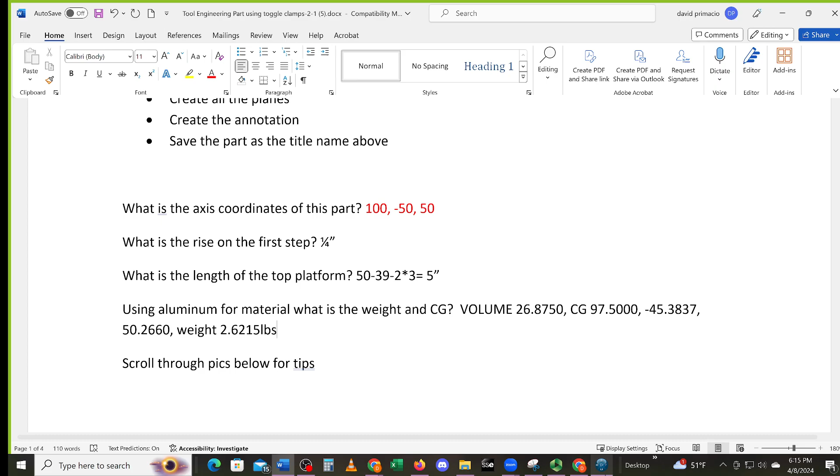Yeah, the only one that was wrong for me is the mass. It shouldn't be—it's almost impossible, because take a look at the thickness and the length of the part. That small part should never be 7 point something. Yeah, no, I think you're correct. I'm just trying to figure out how I got it so wrong. Oh my God, I'm so screwed up right now. What did I do, 100? Oh God, I should have labeled these.

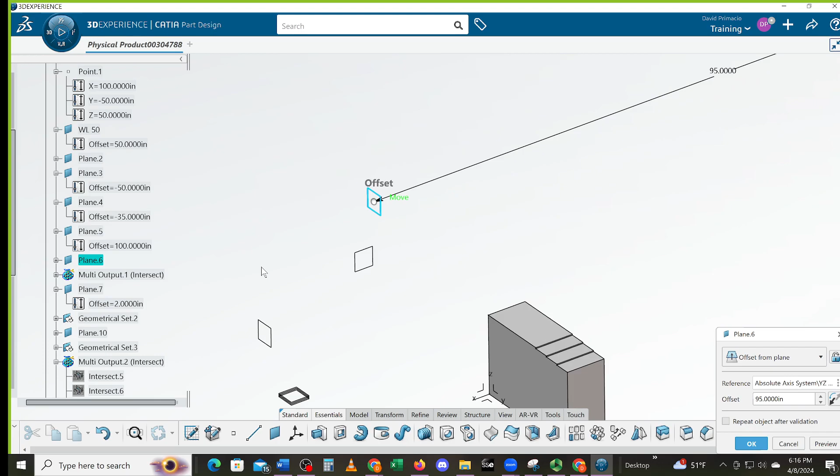All right, I gotta go. I want to see you guys on Wednesday. Have a good night. Okay, Johnny O'Brien, have a good night. We're coming to campus on Wednesday. Yeah, I forgot about that. Good call, Wednesday on campus, Johnny. I'll be there, I'll be there early because I get off at like 3. That's fine. I'm gonna try and get in and get out as fast as I can. Yeah, if you get done early, you can leave early. Cool, all right, see you guys. Have a good one. See you guys later too.

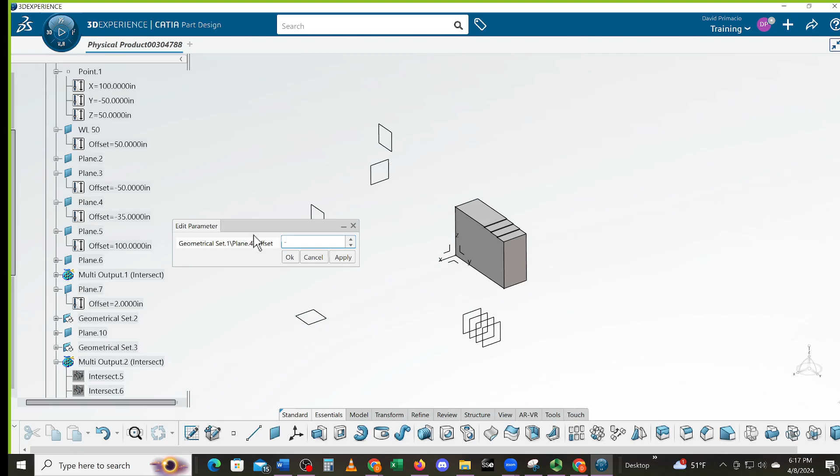That one's 95, and this one's 100. And this one's 50, 50. You need to fix plane 2. Negative 39, right? Yes. -39.0000. I think you changed the water line, Primacio, that's why it went up. What was I changing, 625? Oh yeah. Did I hit decimal? Yeah.

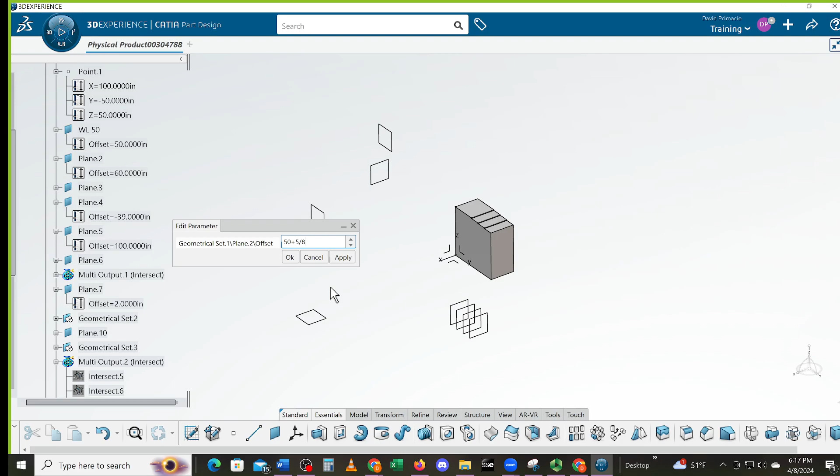That look right? Yes, yes sir. And when you found your weight and inertia, you picked part body, not pad—part body, and then you hit tools. Oh God, I don't have aluminum applied.

I'll say, who had the wrong weight? I think Stuart was saying he didn't have the same weight. I'll say, is it possible there was an incorrect material—like if you double-clicked on the material and checked what the listed density would be? That could be.

6061 T6 or T6 dash? All that, if you search by oldest and get Florentine's version of it—he works for Dassault, and that's the ultimate perfect one. So when I do this, is it dash T6? Yeah, that's the correct one. Second one on the right, you see the Primacio says 6061 T6 core. That's it—so I probably should have done a dash when I did that search.

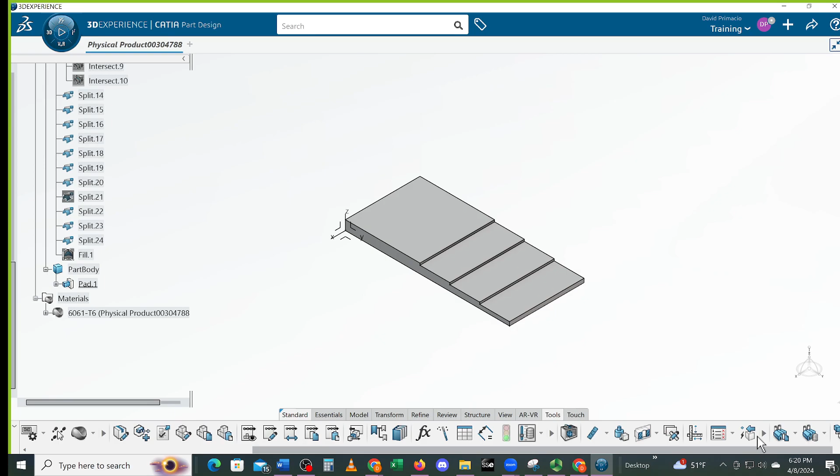I just like to put it in the ISO view here. You know what I like about SolidWorks? It doesn't fit in automatically. And then we'll go to Tools. Highlight part body, highlight part body. Thank you.

That's my inertia? No. Yes? Yes. You? Oh, fucking gosh, damn it. I just updated, so guess what—oh, my preferences gotta be redone. Funny, it's funny because the last time it kept all my preferences. I just had to get my favorite apps in the main Dassault login page.

Length is in inches—I'm surprised. Why is length in inches? 4 places, right? Yes, we got to do pounds. Volume. Luckily this is all done individually—helps me build up my overtime. Density. Why don't you just hit the IPS button, dude? Yeah, nice, 4 places, Mr. Brunotti.

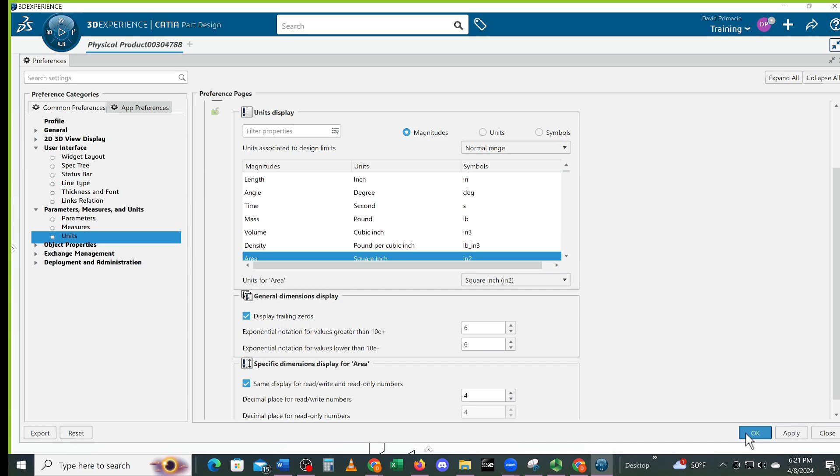Part body highlighted, hit inertia. Do I match your numbers? Because your mass is different. No, match—same thing, mine's perfect. Match is perfect. Yes, same thing, match. Okay, same match, everything—all right, thank God.

All right, that concludes this demo for this part here. The next thing we're going to try and do is build the plate for this, okay? Okay, so...